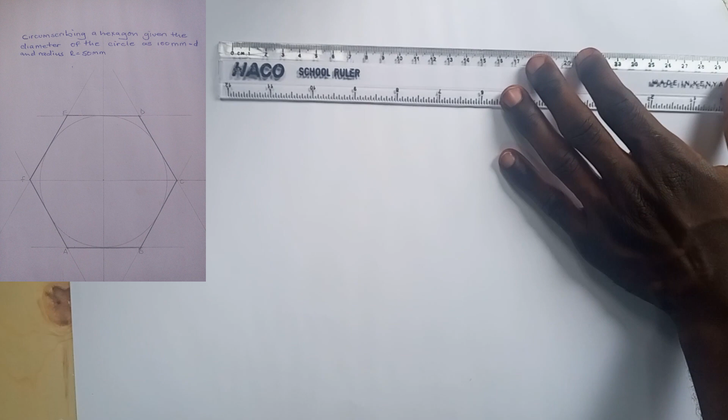So we join these points.

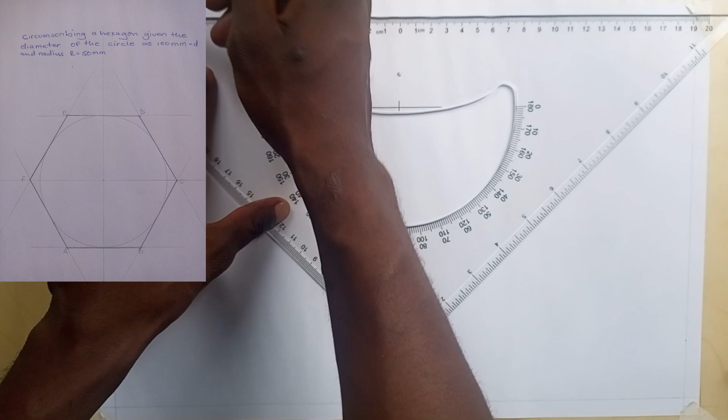So when you're done, you make these lines thicker.

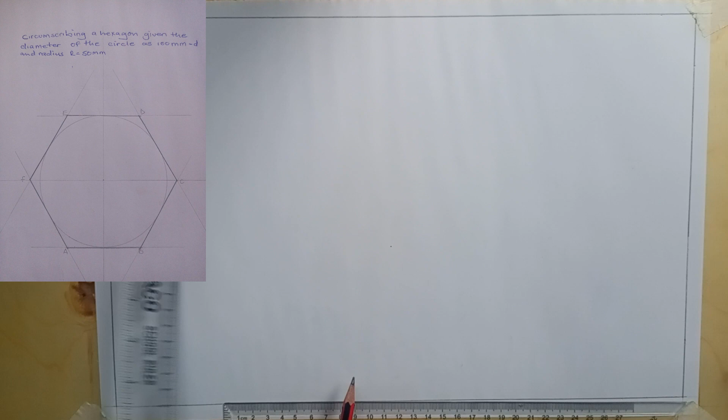So after that, we're going to draw a parallel line from one of the borders. Sorry. Okay.

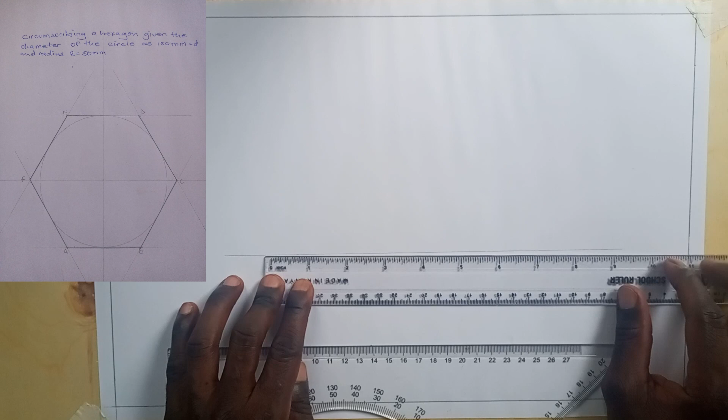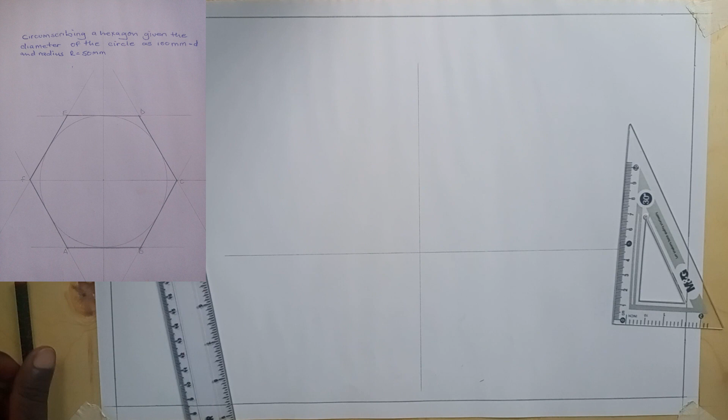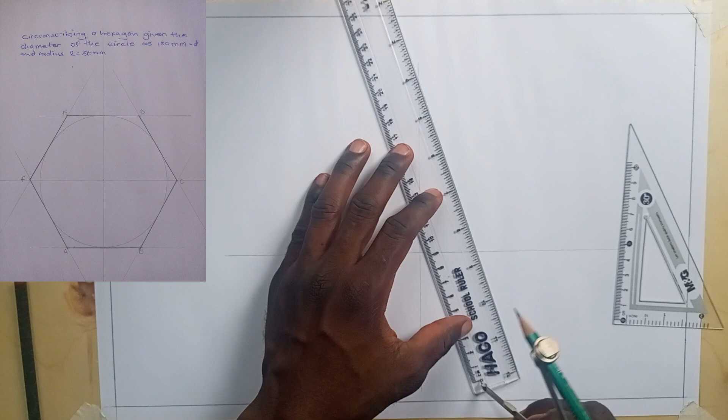So after drawing that line, you also draw a perpendicular to bisect it. So where these two lines meet, it's the center of our circle. Remember our diameter is 100 millimeters. So come to your ruler and measure up 50 millimeters, which is the radius.

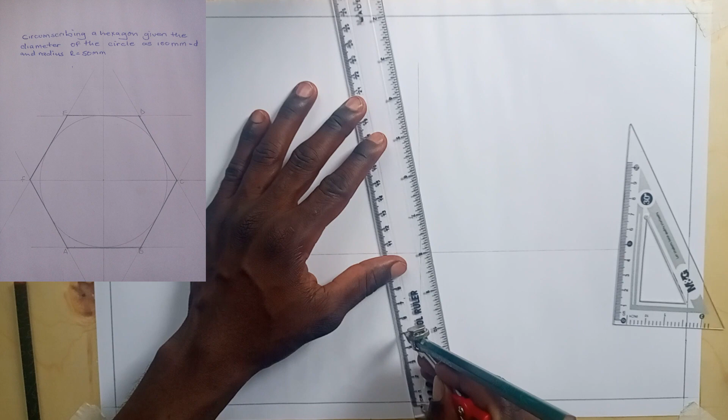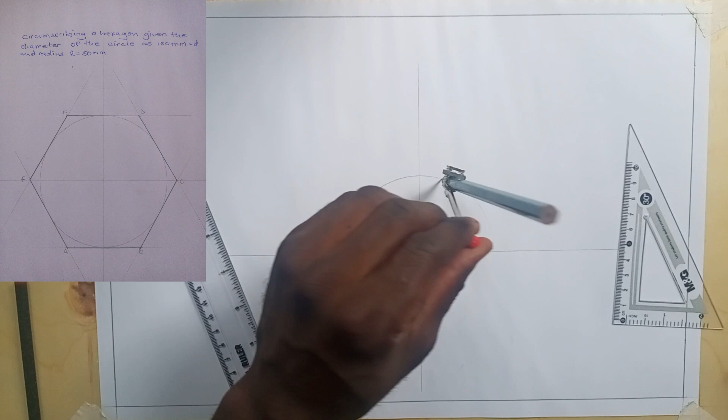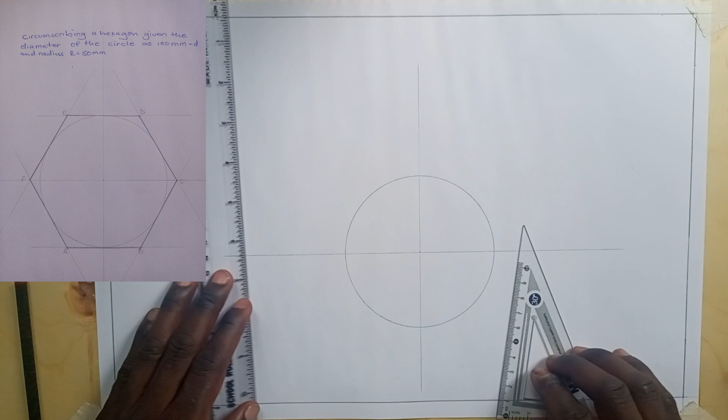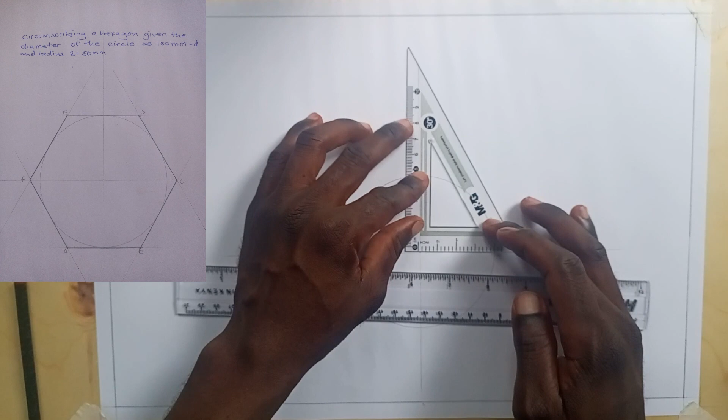So we draw that circle. Okay. So now there is something to note here. If you look at this set square here, this angle here is 30, but then if I tilt it like this, this angle is 60, and this one is 90. To circumscribe a hexagon, we are going to use this side with an angle of 60.

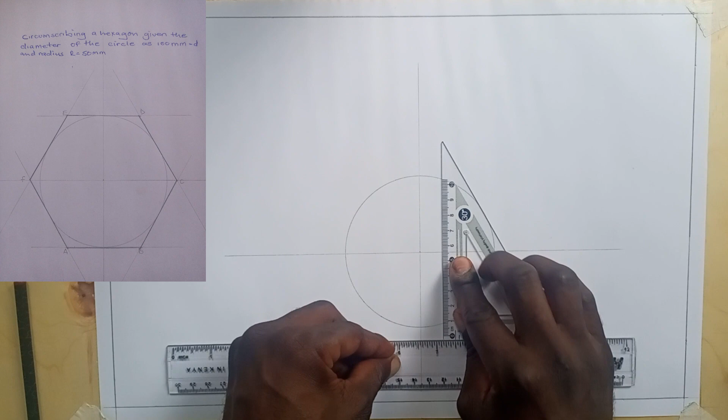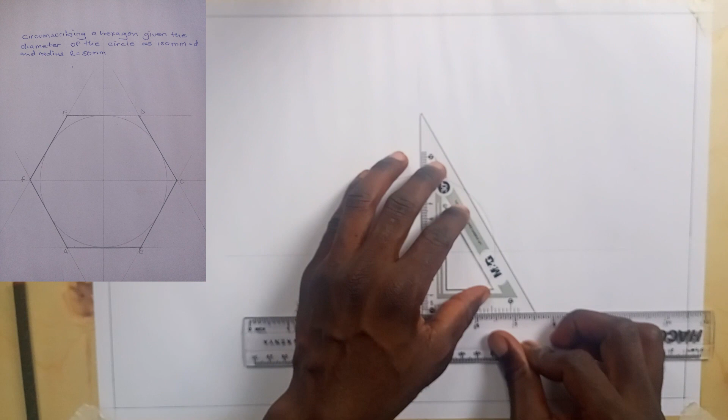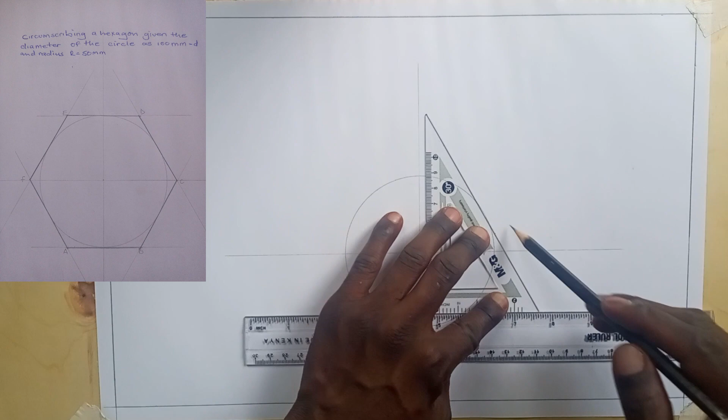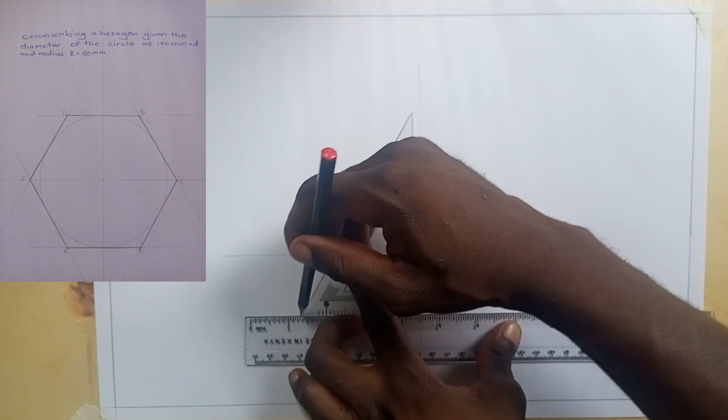So you draw a line touching the circumference of the circle. So you change it. Remember this angle is what? 60. So you also draw another line tangential to the circumference of the circle, right?

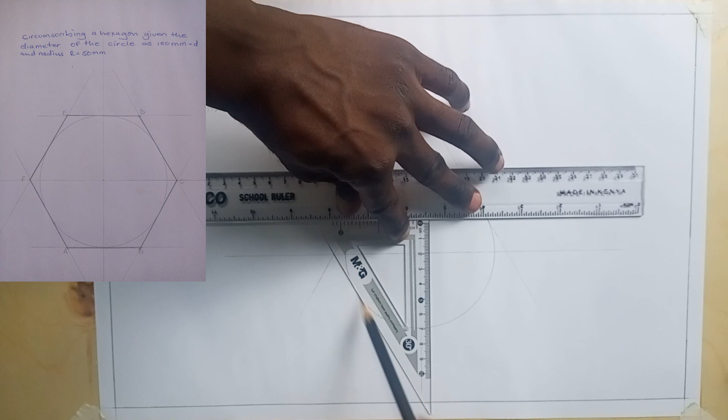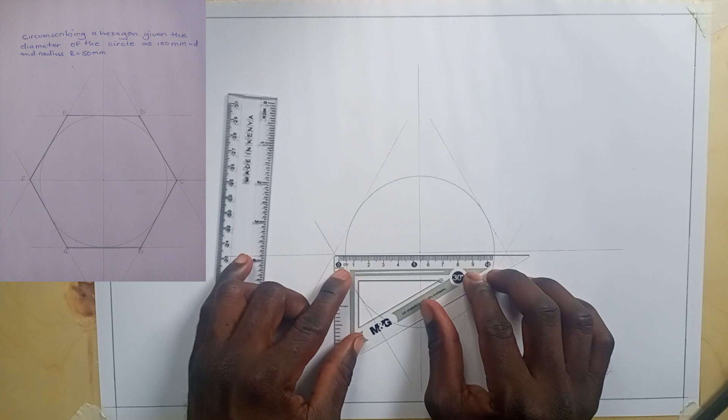So do the same thing this side. You draw a line tangential to the circumference of the circle. Then also change your set square. Okay, so come back to this line, the horizontal line that we first drew, and also draw that line.

Okay, so when you're done, you find that these lines intersect at given points. So these points, we are going to name them. So I name this point A, B, C, D, E, and F. So I join these points, A to F, with a thick line. I do the same thing there.

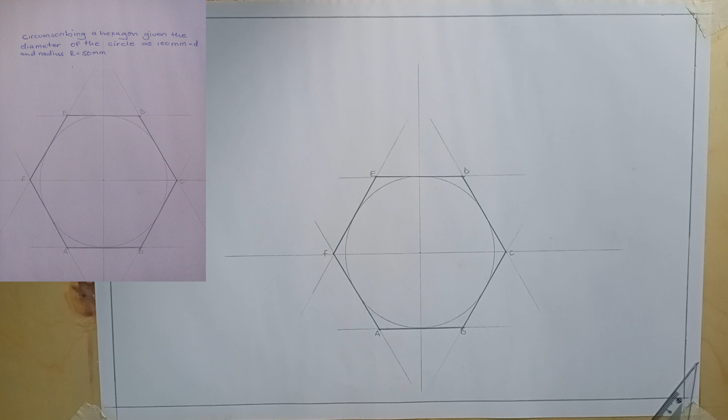So this is the hexagon that we have been looking for. If you're required to circumscribe the hexagon, this is the right method you can go about it.